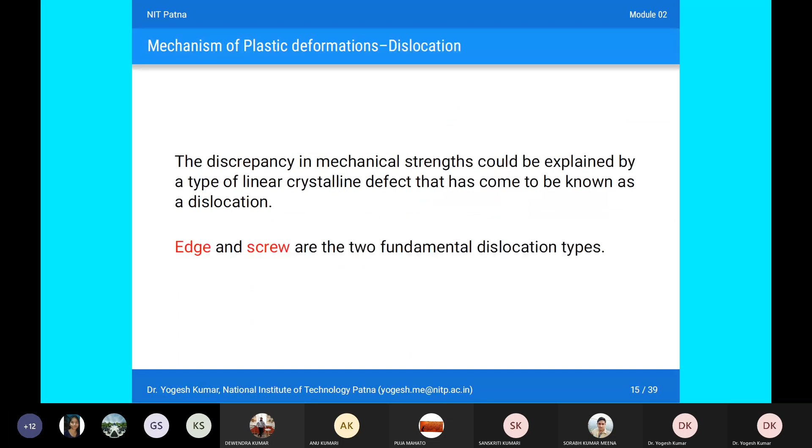Till now we have covered elastic plastic deformation and the mechanism of elastic plastic deformation. Okay, just let me fast forward.

Today we are going to start the new topic in module 2, that is the yield criteria. Most of these topics, as I have come to know through your previous class, may be coinciding with your previous courses, so you might have studied these topics. It might be a kind of revision, and for those who do not remember, it will be new things for them.

So, yield criteria in metals - basically what is the yield criteria, and what does it mean? In today's presentation, actually I have typeset it in a very hurry in the morning. I woke up and I couldn't set pauses, so today's PPT is continuous without any pauses.

In yield criteria of metals, we already know that the material yields when it exhibits an irreversible straining. What does it mean? The irreversible straining means that when we try to strain any metal workpiece, when it exceeds its elastic limit, then some kind of permanent deformation or permanent strain occurs, which is sustained once a certain level of stress distribution is reached.

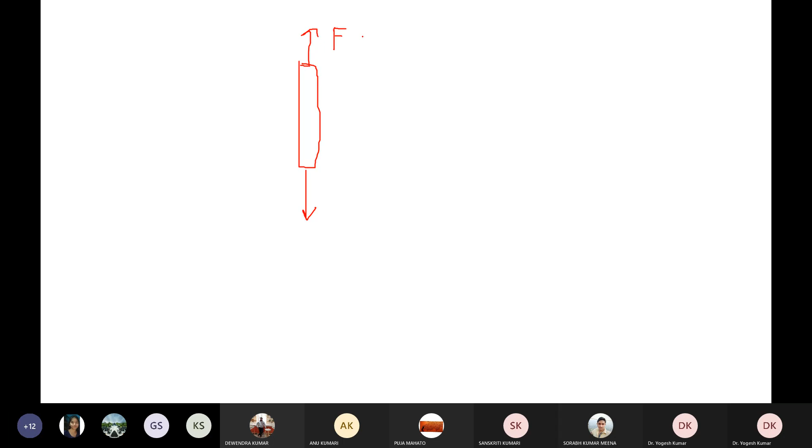Suppose we take one example - in a tensile test, we have a specimen like this, and we apply load. This kind of specimen has a unidirectional force applied, and in a tensile test this kind of arrangement is done. Since the force is in one direction, you can easily compute your yield stress from the tensile test.

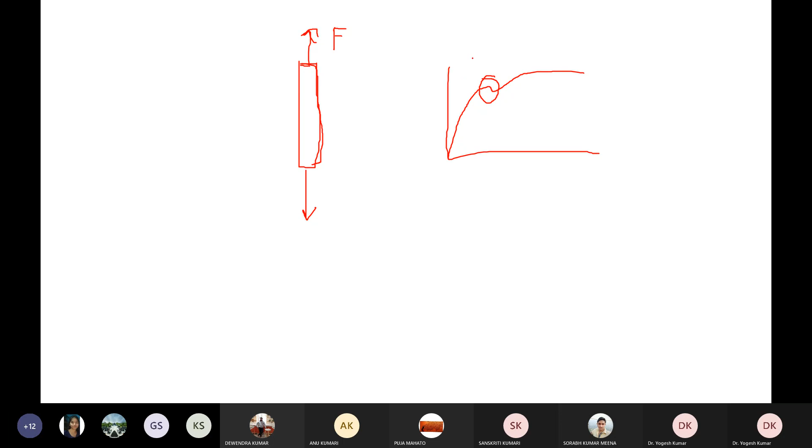After which there is permanent deformation or some plastic strain in your test specimen, you can easily estimate the value of your yield stress using the tensile test when there is unidirectional loading.

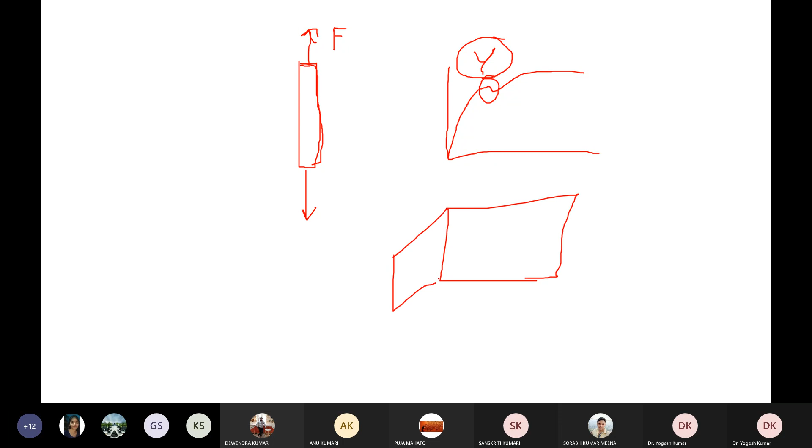But what will happen if you are having a component like this? Let me take one - let us not choose this kind of shape, let us choose some arbitrary shape. Suppose you have this kind of shape, and you are applying certain forces - F1 from this direction, F2 from this direction, and F3 from this direction. What will happen in this case?

How will we determine that the material is getting permanently deformed, or whether the stress developed in this particular component has reached the yield stress value? This cannot be estimated by simply a tensile test or any other simple method. So how do we estimate the state of stress in the case of multi-axial loading?

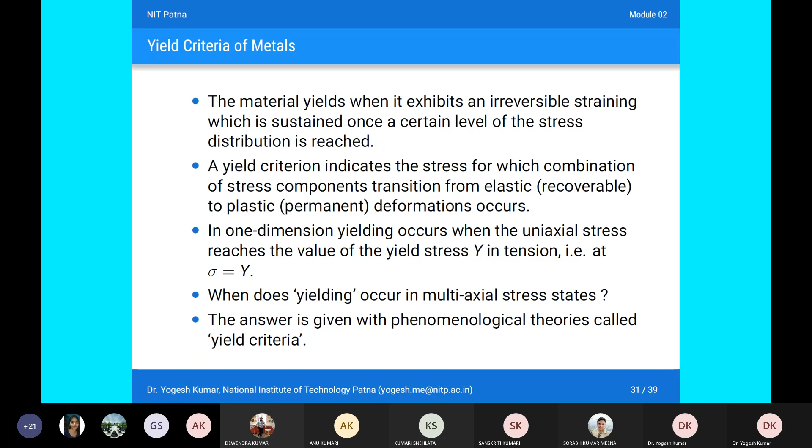In the case of multi-axial loading, the answer may be given using theories which define your yield criteria. The yield criteria is the combination of stress components, including elastic as well as plastic deformation, and it should increase to some critical value beyond which plastic deformation occurs. Only then will you be able to consider your plastic deformation.

Okay, so in general, when we take a metal workpiece, metal component, or test specimen, the most general form of yield criteria may be expressed as a function of sigma x, sigma y, sigma z, tau xy, tau yz, tau zx.

I think all of you are aware about these terms, what is sigma x, sigma y, sigma z, because you might have read these terms repeatedly in either material science or manufacturing courses.

So this function of sigma x, y, z, tau xy, yz, zx is equal to constant, where C represents your yield stress. This yield stress value is constant for any given material, but it is a function of stresses developed in x, y, z, whether they are tensile, compressive, or shear stresses.

In other terms, if you want to write it in terms of principal stresses, you can write it as a function of sigma 1, sigma 2, and sigma 3 equal to

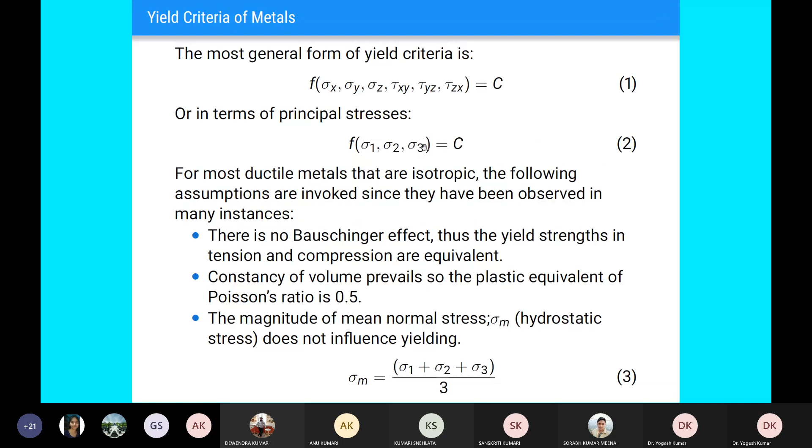We will be discussing and detailing your yield criteria. The yield criteria, in terms of principal stresses, was given as a function of sigma 1, sigma 2, and sigma 3. This function may be further elaborated as a function of sigma 1 minus sigma 2, sigma 2 minus sigma 3, sigma 1 minus sigma 3, equal to constant, which equals your yield stress.

So we can now define a yield criteria. What is a yield criteria? Yield criteria is a hypothesis defining the limit of elasticity in a material, and the onset of plastic deformation under any possible combination of stresses.

Ultimately what we are trying to say is that the total stresses in combination of all directions, whether these are shear stresses or direct stresses, must exceed a certain critical value. Only then will plastic deformation occur.

In the case of uniaxial loading, we were quite sure that when the value exceeds a value, that is Y, yielding will occur. That is, there will be some plastic deformation, or some portion of plastic strain in the total strain of your test specimen or the metal undergoing deformation.

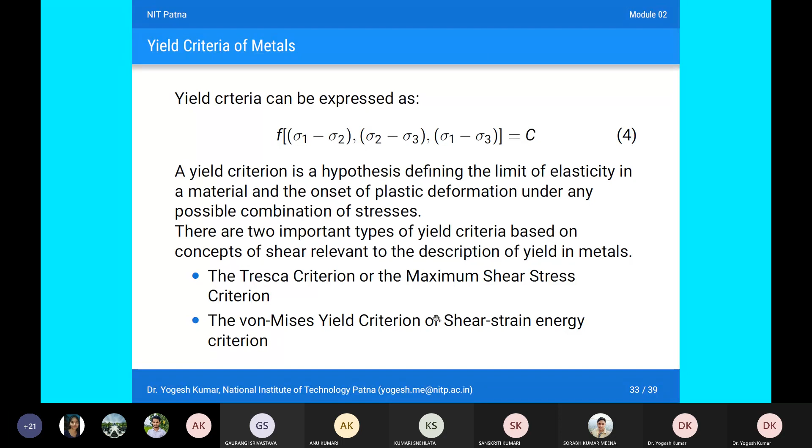So in order to determine this, there are various theories, and basically two major types of yield criteria, based on two major criteria: one is maximum shear stress, and the other is shear strain energy criteria. The first is called Tresca criteria, and the second is called von Mises yield criteria.

Let us take Tresca yield criteria. It is based on maximum shear stress criteria. In Tresca yield criteria, what we assume, or what has been given in the literature, is that the difference of the maximum shear stress and minimum shear stress must exceed a given certain critical value.

Suppose this critical value is C, taken as a constant for any particular material. Suppose sigma max is your largest shearing stress, maximum shear stress, and sigma minimum is your minimum stress. The difference of sigma max and sigma minimum should be equal to your yield stress, or you can write it as sigma 1 minus sigma 3 equal to constant, where C is your constant.

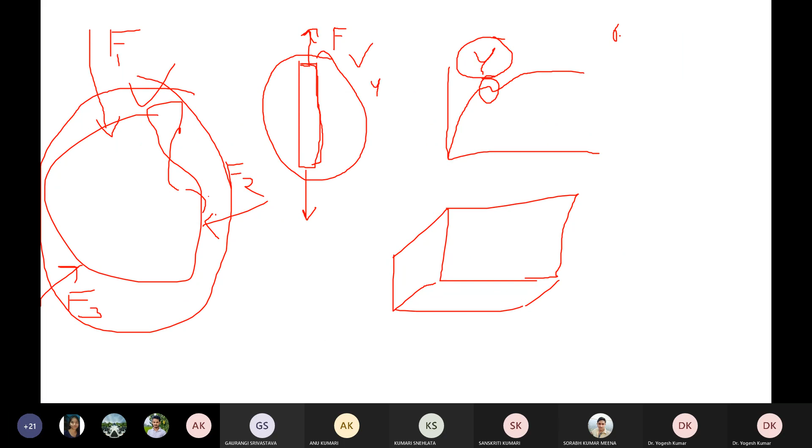Suppose in the examination it is given that sigma 1 equal to 35 megapascal, sigma 2 equal to 45 megapascal, and sigma 3 equal to 42 megapascal. Suppose something like this is given in your question paper, then you have to solve the problem using your Tresca yield criteria.

You will not simply apply the equation sigma 1 minus sigma 3 equal to C. You have to see which is having the maximum value and which is having the minimum value. In this case, sigma 2 is having the maximum value. So what will be the yield criteria? Sigma max minus sigma minimum. Which one is having minimum value? Sigma 1 is having minimum value. So sigma 2 minus sigma 1 is equal to C. This is how we have to be very careful while applying the Tresca yield criteria. You need not simply remember sigma 1 minus sigma 3 equal to C. You have to be very careful which rule is valid while giving nomenclature sigma 1, sigma 2, and sigma 3. Sigma max minus sigma minimum is equal to constant.

Let's try to see in the case of uniaxial loading what happens. Let me create a new slide. So in the case of uniaxial loading, you have a force F, and in this particular uniaxial direction, you are having stress sigma 1.

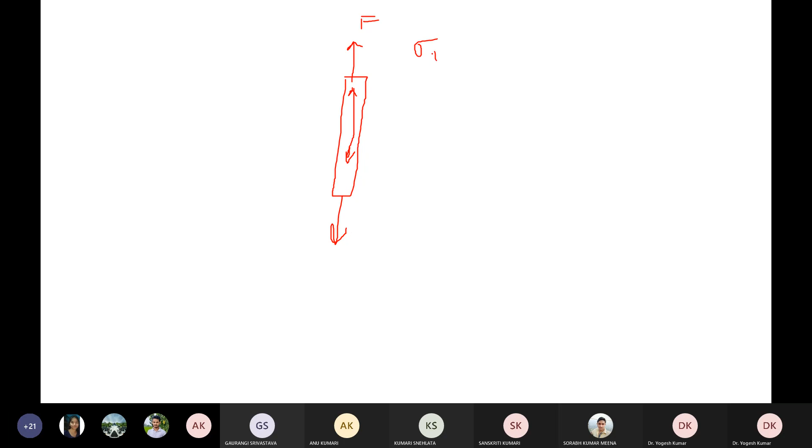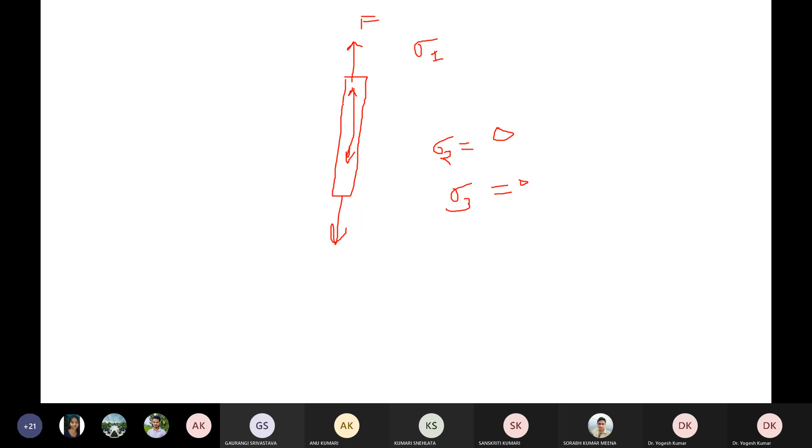What will be the other stresses? We are assuming there is no stress along any other direction, so sigma 2 and sigma 3 are equal to 0. So in the case of uniaxial loading, how will yielding occur? Yielding will occur only when sigma 1 reaches the yield stress value. So sigma max is equal to sigma 1, sigma 2 equal to 0, sigma 3 equal to 0. It means your sigma minimum is equal to 0. This condition will be applicable in the case of uniaxial loading.

And this will yield your yield strength, sigma 1 equal to Y. Put these values in sigma max minus sigma minimum equal to C. So this will be sigma 1 minus sigma 3 equal to Y. We can conclude in the case of uniaxial loading, your yield strength will be equal to Y. Yielding will occur when the load or stresses developed exceed the yield strength value in the direction of loading.

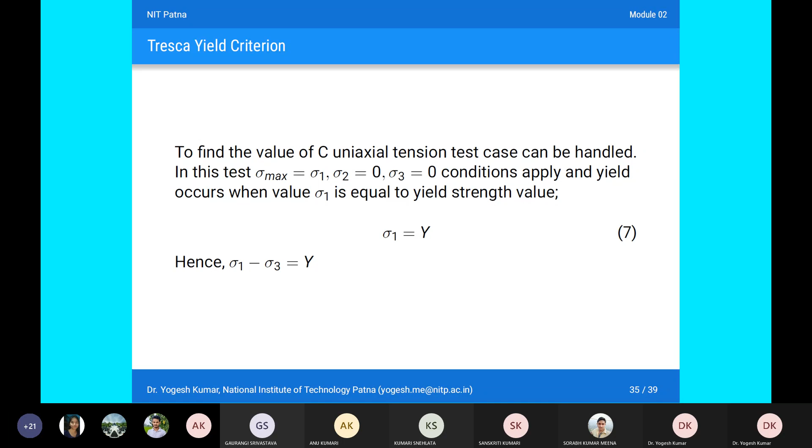Consider another case, the case of pure shear stress. In the case of pure shear stress, sigma max will be equal to sigma 1, sigma minimum is equal to sigma 3, which will be negative of sigma 1, and sigma 2 will be equal to 0. Because in pure shear, the two stresses are opposite in nature and act on a plane. So on one plane the stress will be sigma 1, and on another plane the stress will be minus sigma 1.

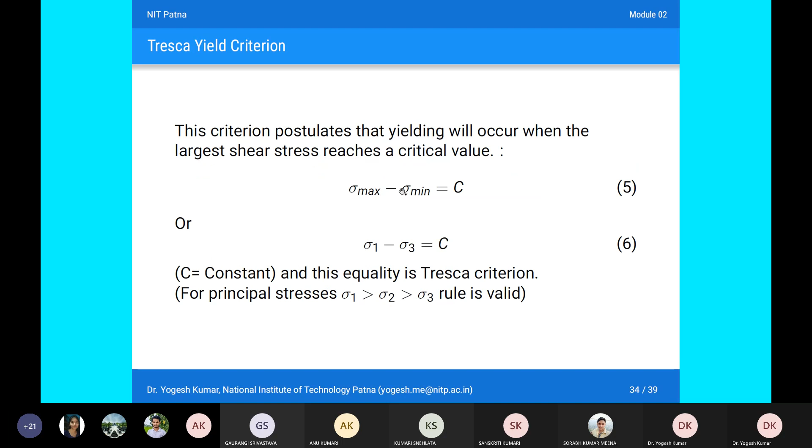Using this same Tresca yield criteria, we can conclude how yielding will occur: sigma max minus sigma minimum equal to C. Sigma max is sigma 1, sigma minimum is sigma 3. So this becomes minus minus plus, which becomes twice of sigma 1. So we can write it as 2K, which is equal to your yield strength value. Using the Tresca yield criteria, we can write sigma 1 minus sigma 3 is equal to Y is equal to 2K.

Okay, so this is all about your Tresca yield criteria. Now let us take one simple example. I will discuss maybe two or three examples.

In axis 1, we are having stress sigma. In axis 2, in the direction that is y, we are having stress again, because this is the case of equibiaxial tension. We are equally applying equal forces in two directions, that is 1 and 2, or x or y, whatever you are convenient.

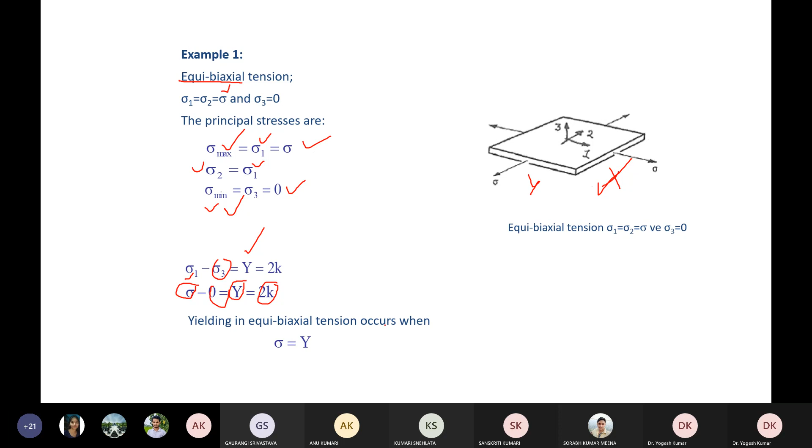So you can write it equal to 2K from the previous conclusion. So this will yield that your yielding in equibiaxial tension will occur when your applied stress has exceeded your yield stress, this particular value y.

Take another example. We will try to understand what is the effect of hydrostatic pressure on the yielding of metals. So in the case of hydrostatic pressure, suppose you are having a workpiece.

Suppose you are having some workpiece like this, and it is under some hydrostatic pressure from all sides. There is some metal sheet, something like this, which is under some hydrostatic pressure, or it has been kept, you can say, in the sea water. So obviously this will be under some kind of pressure.

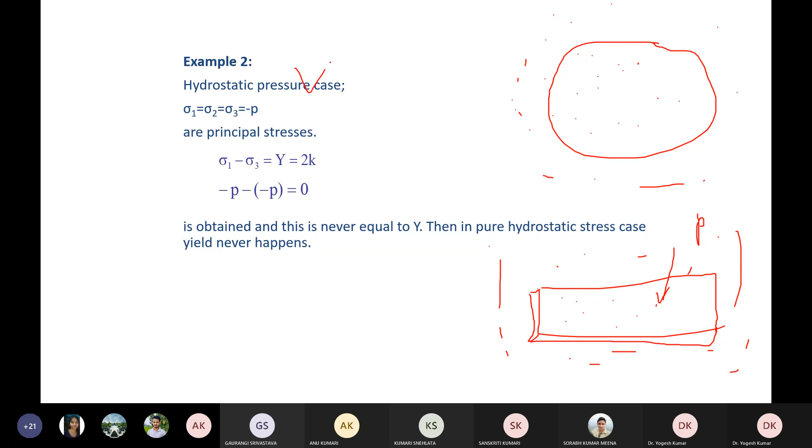Here you can see the forces or the stresses developed due to hydrostatic pressure would be sigma 1 equal to sigma 2 equal to sigma 3, and the value will be equal to minus p. So take the case when you are applying hydrostatic pressure, the principal stresses will be: sigma max will be equal to minus p, sigma minimum again will be equal to minus p.

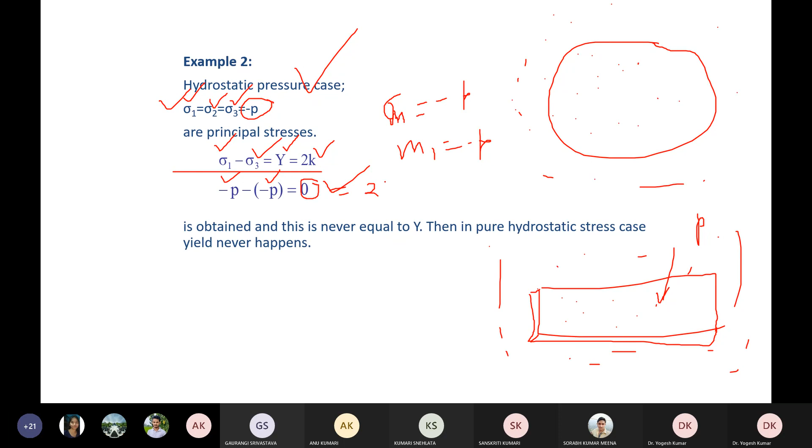Now try to see sigma 1 minus sigma 3 equal to y equal to 2k. We are applying Tresca yield criteria in the case of hydrostatic pressure. So put the values: sigma max minus p, sigma minimum minus p, minus plus. So this will be equal to 0. Since the value is 0, which is not equal to your yield criteria, that is 2k or y.

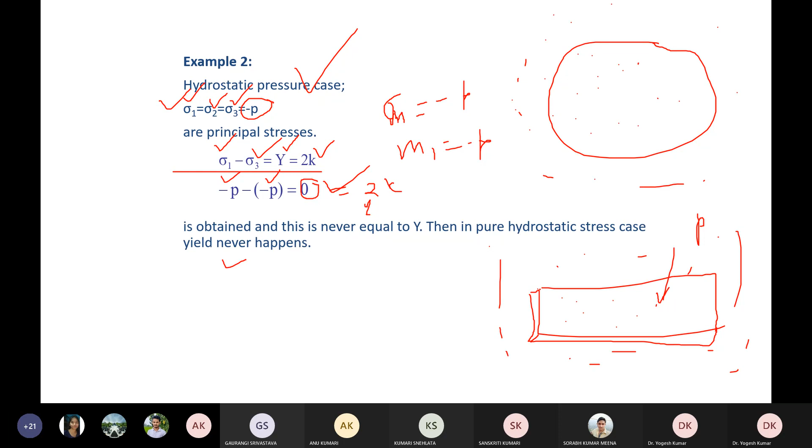So we can say that in the case of pure hydrostatic stress, yielding will never happen. So wherever you have any metal component or workpiece which is under the action of, or which is kept in a pressurized fluid or chamber, it is not going to yield plastically.

Okay, it will remain in the same position wherever it is. One more example to elaborate, with more clarity, about the effect of hydrostatic pressure.

Let us take the state of stress where sigma 1 equal to 80 megapascal, sigma 2 equal to 45, sigma 3 equal to minus 30. These are the given values for a material which is under loading, and suppose you want to give 50 megapascal of fluid pressure. This will ultimately be added to all the stresses sigma 1, sigma 2, and sigma 3. Let us try to understand the yielding without hydrostatic pressure, then we will try to understand with hydrostatic pressure. So in the beginning, sigma 1 is equal to 80, sigma 2 is 45, sigma 3 equal to minus 30 megapascal. Let us take this case.

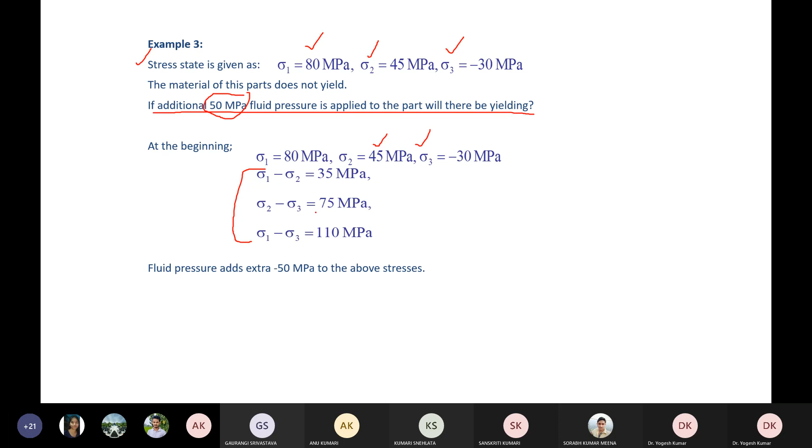This is sigma 1 minus sigma 2. So even if it is not required, I have done this. You can simply do like this.

Okay, sigma max, what is the value of sigma max? Sigma max will be 80. Sigma minimum, what will be the value? Sigma minimum will be minus 30.

Okay, so apply the yield criteria. Sigma max minus sigma 3. This would be 80 minus of 30. Okay, so this will become 110.

Okay, so since you have applied your hydrostatic pressure, it will not give any impact. I think it is already clear. Let me not elaborate more on this effect of hydrostatic pressure, because time is running fast and I have to finish one more connected yield criteria. If there is any confusion on the hydrostatic pressure, then I will elaborate more.

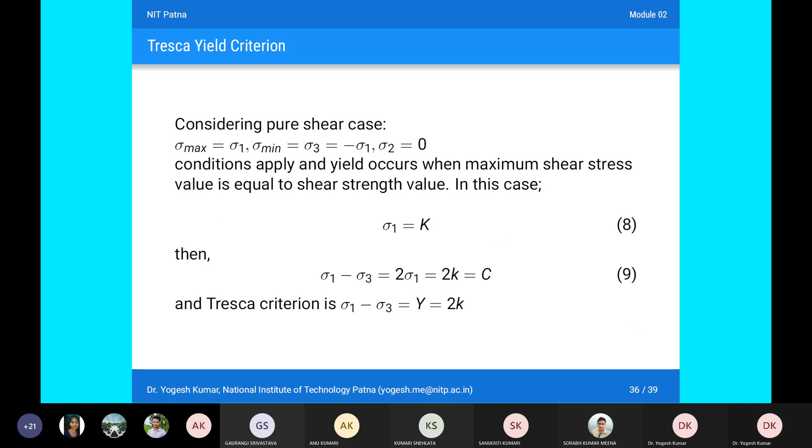Any query? Otherwise, I will move to the next yield criteria. So I expect the effect of hydrostatic pressure on yielding does not give any impact. It is clear to all of you. So now let us take another yield criteria, that is the von Mises yield criteria.

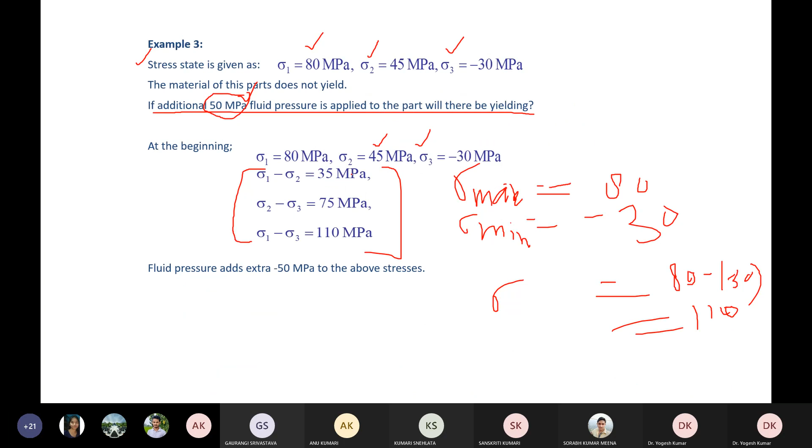In this test, when sigma 1 is equal to yield strength value, the yielding will occur. So we are aware that in the case of uniaxial testing, your sigma 1 should be equal to your yield strength sigma y, and your sigma 2 and sigma 3 obviously these would be 0.

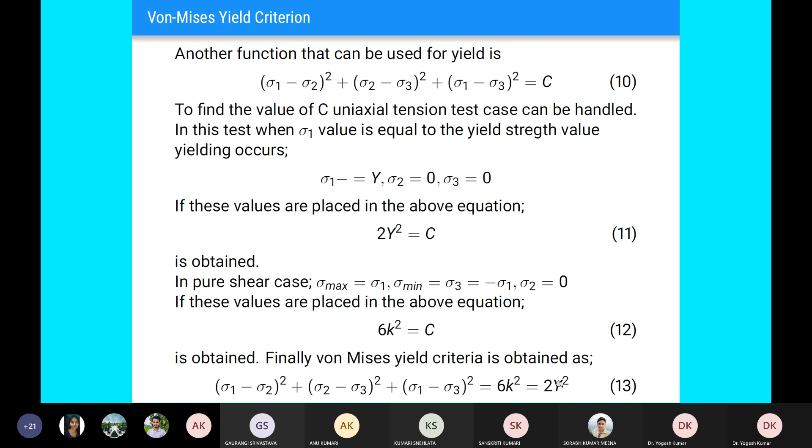So what will be the value of y, that is the value of yield stress? This will be equal to y equal to 1 upon root 2. We are simply calculating the value of Y from equation number 13. So this will end up with the value y equal to an expression, square root of this.

So the amount of principal stresses in this equation is just at yield limit. If the equation is analyzed, y should be replaced with sigma bar, which indicates equivalent stress. So you can replace y with your equivalent stress, represented by sigma bar. The equation for equivalent stress would become sigma bar equal to the same expression from equation number 15. So this is about von Mises yield criteria.

Let us try to elaborate this using some examples. Let us take the example of equibiaxial tension, axes 1, 2, and 3. Sigma 1 equal to sigma 2 equal to sigma, we are already aware of this. Sigma 3 is equal to 0. Substitute these values in the expression for equivalent stress.

So in the case of this loading, you are applying the von Mises yield criteria, putting the values of sigma 1, sigma 2, and sigma 3. So sigma bar would yield sigma bar equal to 1 by root 2 times sigma 1 minus sigma 2, sigma 2 minus sigma 3, sigma 3 minus sigma 1, minus sigma 3, square root of it. So this will be sigma, this will be 0, this will be sigma square, this will again be sigma square.

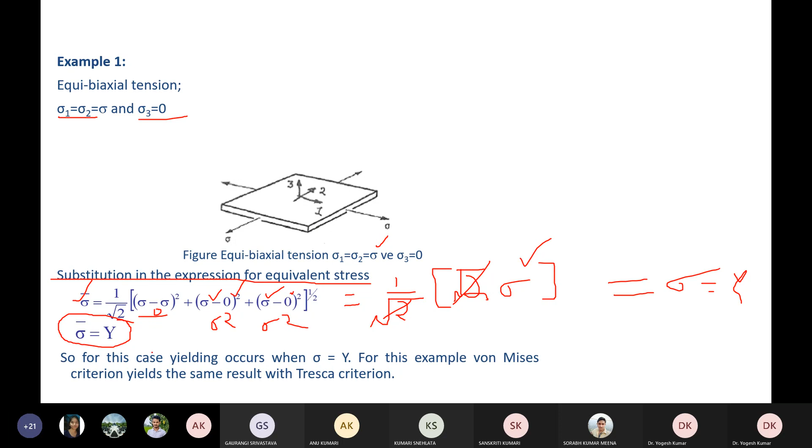So in the case of von Mises yield criteria, when applied in the case of equibiaxial tension, this yields equal to y, that is your yield stress. So this may be written as sigma bar, equal to your equivalent stress, is equal to y. So for the case of biaxial equibiaxial tension, yielding will occur when your stress in each direction is equal to y.

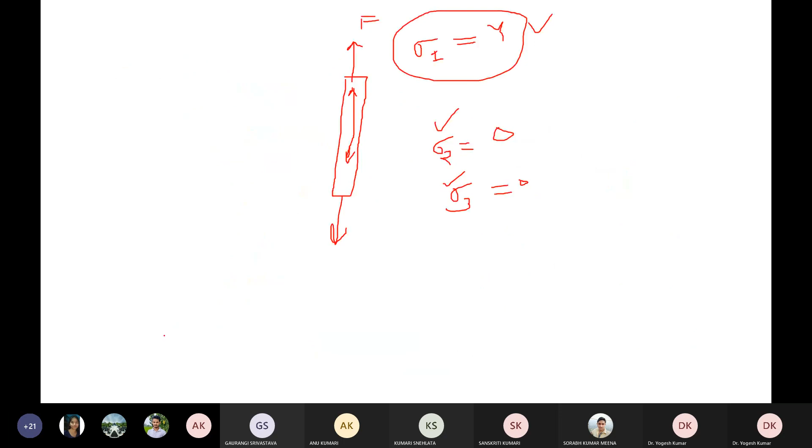Okay, so you can see what was the result, the stress required in the case of Tresca yield criteria. In the case of Tresca yield criteria, you can see the stress required was again the same value, sigma equal to y. So in the case of equibiaxial tension, you get the same value for both the criteria, whether it is the Tresca yield criteria or von Mises yield criteria.